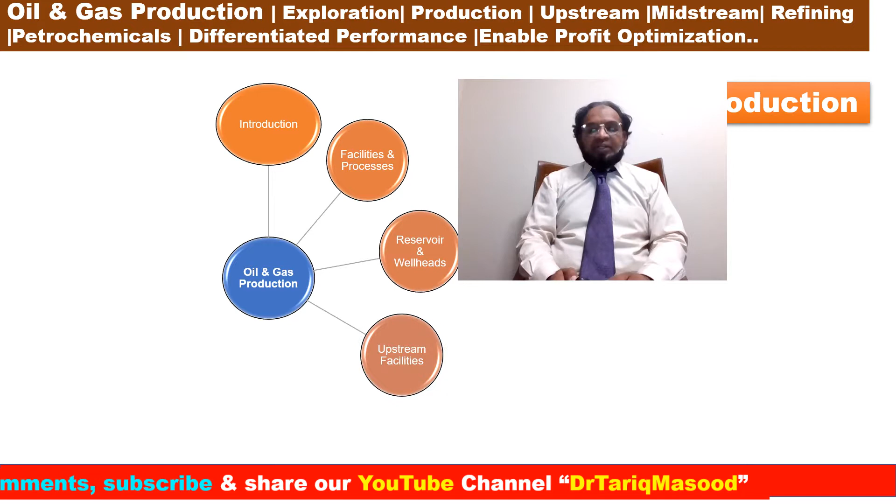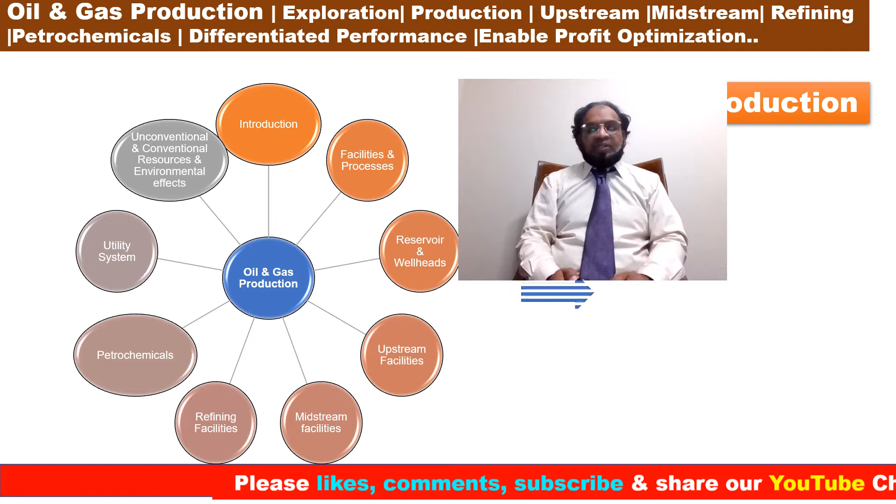Okay. So, oil and gas production: introductions, facilities, processes, reservoir and wellhead, upstream facilities, midstream facilities, refining facilities, petrochemicals, utility systems, unconventional, conventional resources, and environmental effects. What is the ultimate goal? Shaping the clean and sustainable global energy delivery. Plan to deliver more than 300 lectures in the next couple of years.

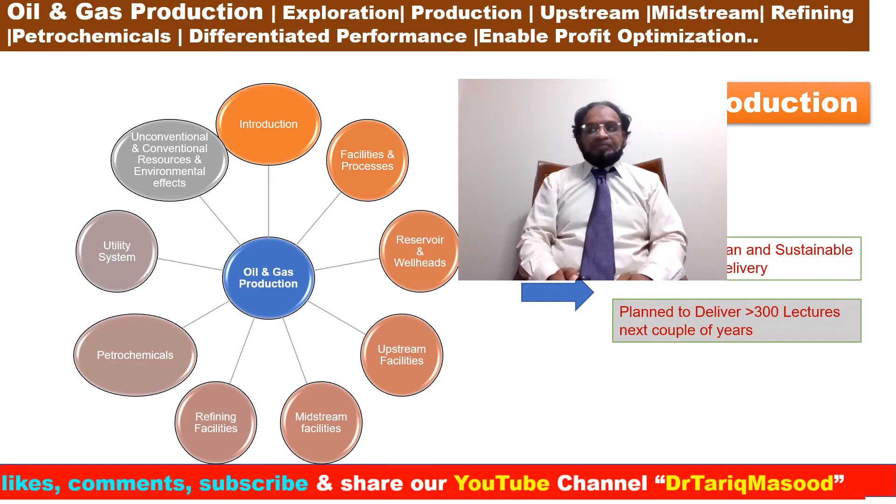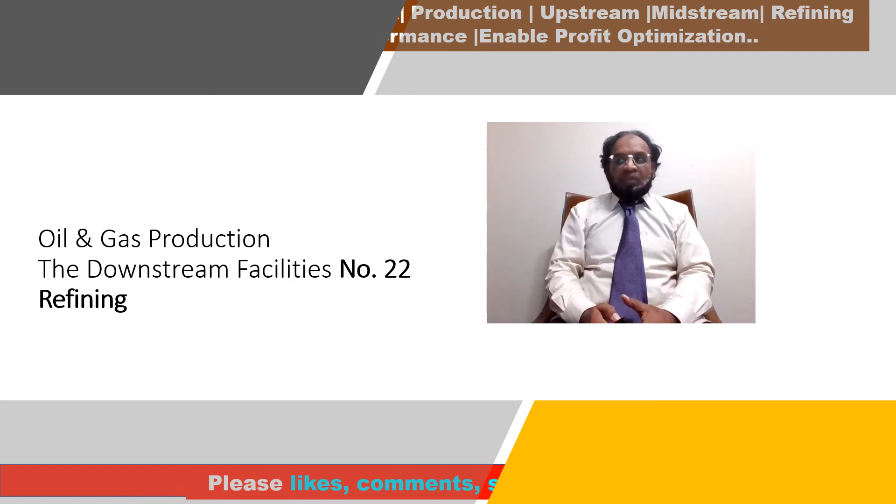Okay, oil and gas production, downstream facilities, lecture number 22, refining, we are going to discuss today. So for my next slide, I will give you key takeaway points from lecture number 22. Key takeaway points, lecture number 22. Today we are going to discuss refining process, fractional distillation, naphtha, gasoline, kerosene, and diesel oil.

Okay, refining description. Up to the early 1970s, crude oil prices were kept reasonably stable by major international oil companies and industrialized nations. Less value was created in the upstream production operation, and relatively more profits were generated in refining and distribution operations. With the 1973 oil crisis and rising crude oil prices, more of the value was created upstream.

Now, the success of the modern refinery depends upon economies of scale and the ability to process a wide range of crude into the maximum quantity of high-value fuels and feedstock. A refinery that is able to handle multiple types from heavy to light crude is said to have a large swing. Okay, trade specifications such as West Texas Intermediate, WTI API 38.3, Brent blend API 38.3, Heavy Arab crude API 27.7 or Grane API 18.7 are examples of such crudes.

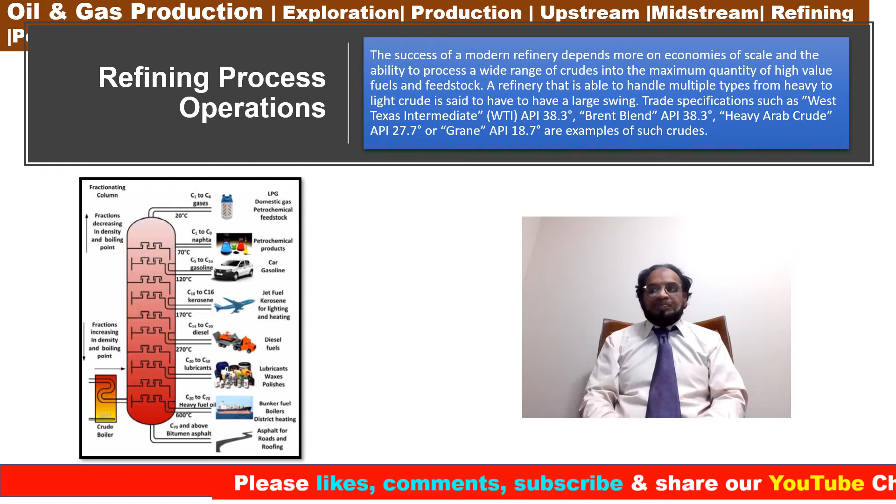Medium light crudes can be used directly in early engines and burners. Modern consumers such as gas and diesel engines, aviation turbojet engines, and ship bunkers need fuel manufactured to a precise specification. This includes removing contaminants and pollutant particles such as sulfur or H2S. Okay.

Okay. Fractional distillation. The basic refinery uses fractional distillation. Incoming crude is heated to its boiling point. It then enters the distillation column, which separates the different fractions. The column is of the reflux type, where a colder condensed fluid running down is reheated by rising vapor that is in turn condensed. This produces a clear thermal zone where the different products can be drained.

Okay, as per the schematic, if you can see here, and we will just discuss each segment in my next slide. Both atmospheric and vacuum distillation are used, vacuum to avoid heating the raw crude to more than 370 degrees Celsius. Overheating would cause thermal cracking and excessive coke that may also plug pipes and vessels.

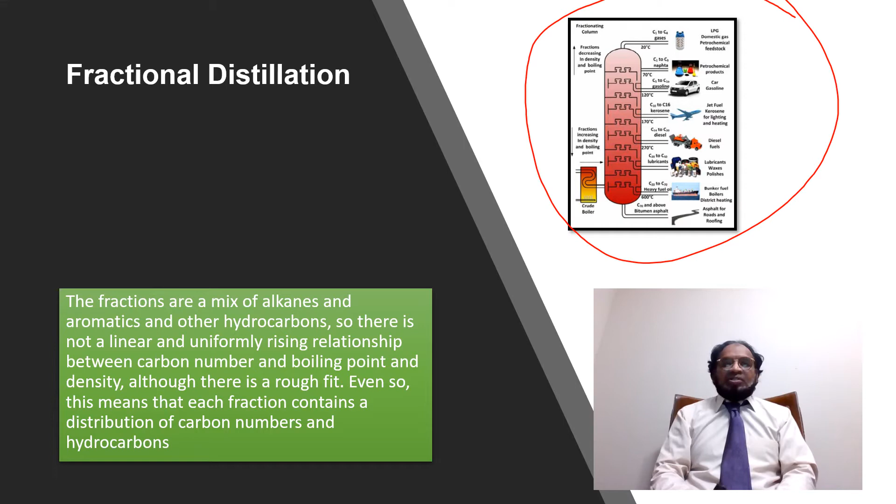Also, a side cut stripper is used in addition to the main column to further improve the separation process. Side cut is another name for the fractions emerging from the side rather than the top and bottom of the main column. Okay, naphtha, gasoline, kerosene, and diesel. The fractions are a mix of alkanes and aromatics and other hydrocarbons, so there is not a linear and uniform rising relationship between carbon numbers, meaning that each fraction contains a distribution of carbon numbers and hydrocarbons.

Okay, basic products of the fractional distillation column. Okay, if you can see here, the first is LPG, domestic gas petrochemical feedstock, that is drawn at 20 degrees C, C1 to C4 gas. Number second is petrochemical products, naphtha. Okay, it contains C5 to C9 at 70 degrees Celsius. And third, car gasolines, C5 to C10. So it is drawn at 120 degrees Celsius.

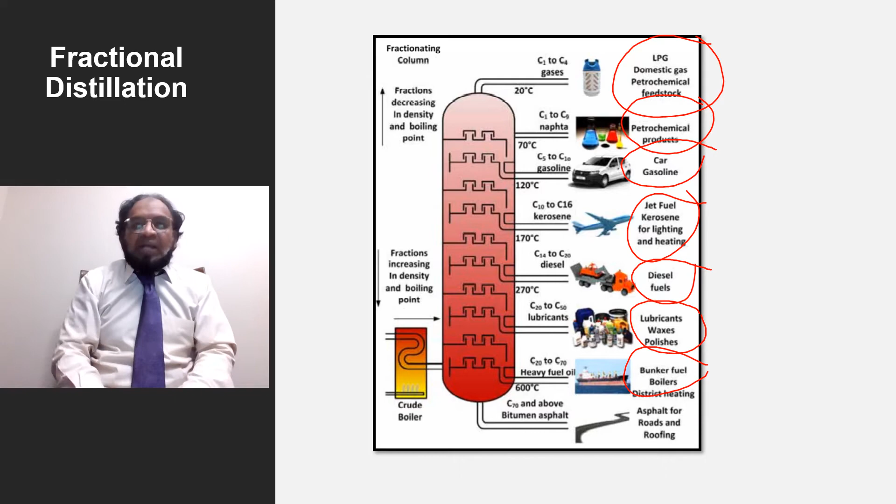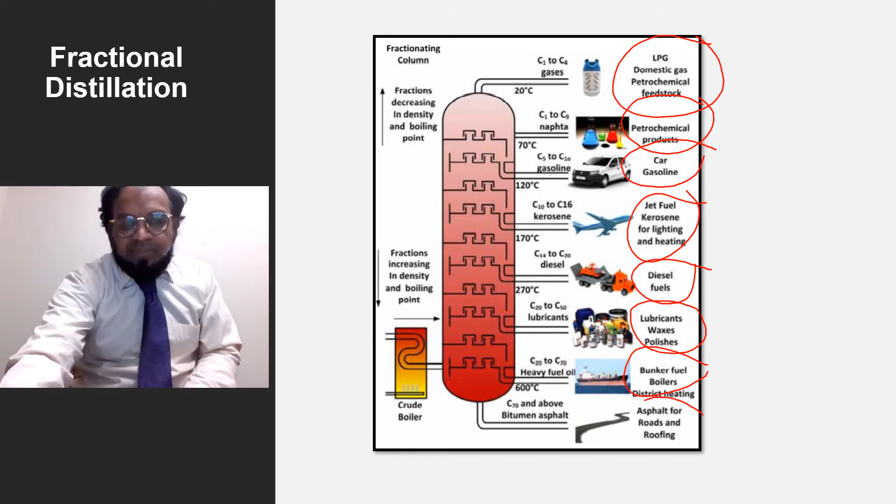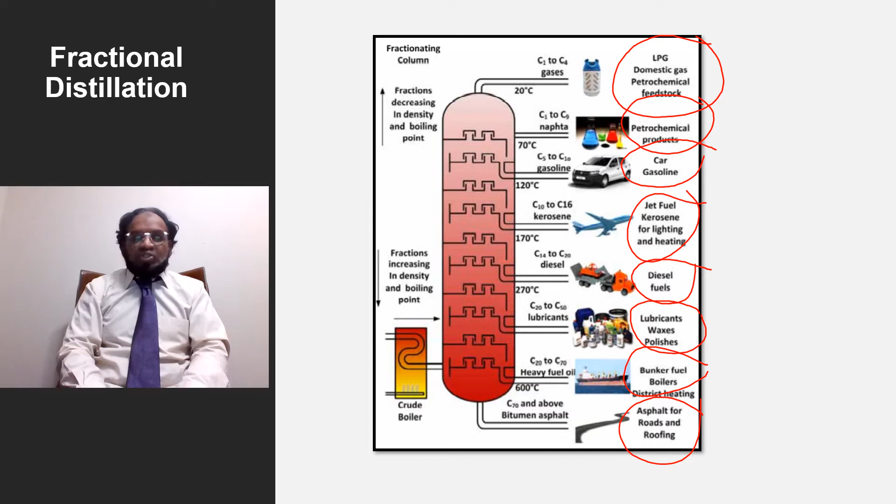Okay, so the jet fuels here, C10 to C16 kerosenes, 170 degrees. And next is diesel fuels, C14 to C20, 270 degrees Celsius. Okay, so then lubricant, wax, polish, C20 to C50 lubricants. And then over here is the bunker fuels, boiler, district heating, 600 Celsius, C20 to C70 heavy oil. And last here, asphaltene, C70 and above, bitumen asphalt for construction purposes, roads and other purposes.

Okay, fractional distillation, continuous distillation process. Okay, first we are going to discuss liquid petroleum gas, LPG. It has a carbon number of 1 to 4 and boiling point up to 20 degrees C. Most of the LPG is propane and butane with carbon numbers 3 to 4 and boiling points minus 42 degrees C to minus 1 degree C respectively.

Typical usage: domestic and camping gas, LPG vehicles and petrochemical feedstock. Second is naphtha. Naphtha, or full range naphtha, is the fraction with boiling points between 30 degrees C to 200 degrees C, and molecules generally have a carbon number of 5 to 12. The fraction is typically 15 to 30% of the crude oil by weight.

It is used mainly as a feedstock for other processes as well: refinery producing additive for high octane gasolines. Number 2, it's a diluent for the transport of very heavy crude. Feedstock to the petrochemicals, olefins chain, feedstock for many other chemicals, and as a solvent for cleaning purposes.

Next is gasoline. Gasoline has a carbon number mainly between 4 to 12 and boiling points up to 120 degrees C. Its main use is as a fuel for internal combustion engines. Early on, these fractions could be sold directly as gasoline for cars, but today engines require a more precisely formulated fuel, so less than 20% of gasoline at the pump is the raw gasoline fraction.

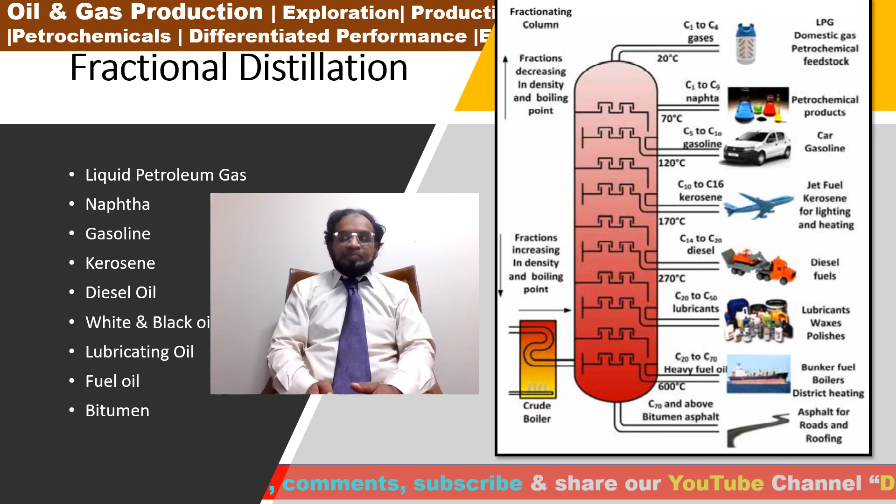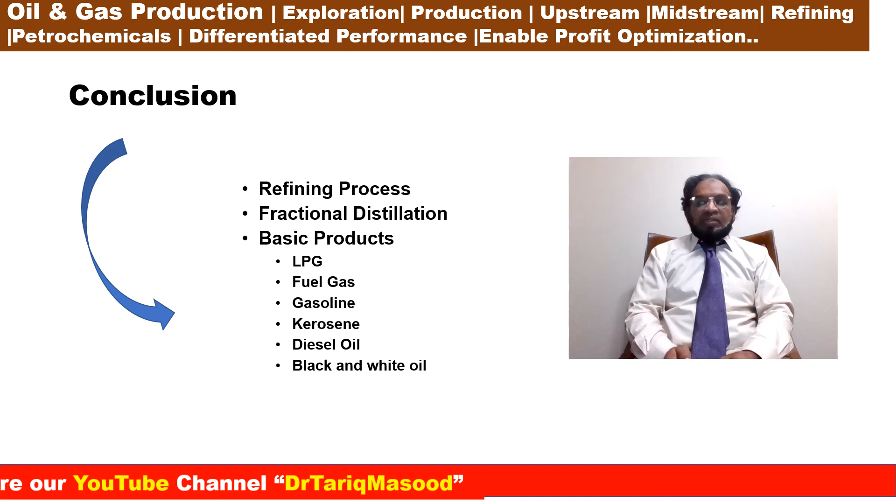Today we have discussed the refining process, fractional distillation, basic products, LPG, fuel gas, gasolines, kerosenes, diesel oil, and black oil and white oil. My next topic: oil and gas refining facilities, lecture number 23.

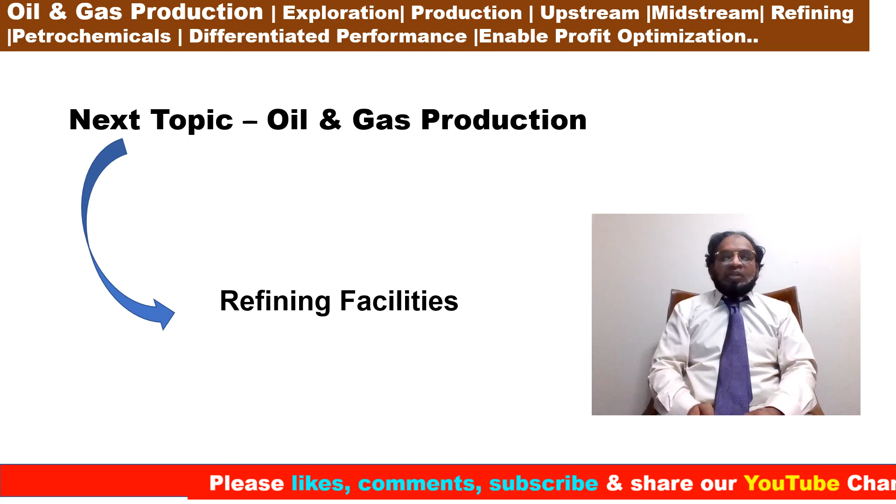References: Qatar Petroleum, Doha, Qatar; Oil and Gas Development Corporation, OGDC, Pakistan; World Energy Outlook 2013; US Geological Survey; US Department of Energy; Schlumberger Oil Field Glossary; International Energy Agency; Wikipedia; Oklahoma State Oil; Norsok Standard, Norway; Story of Oil in Pennsylvania; Liquid Gas Encyclopedia; Natural Gas from Wellhead to Burner Tip.